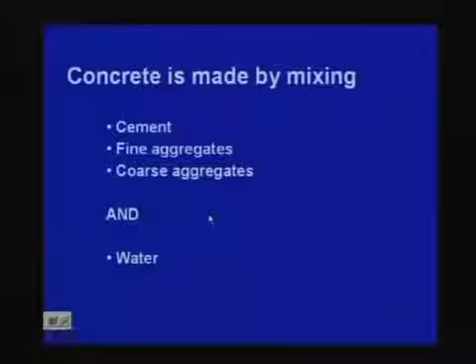As I have told in the last class, concrete is made by mixing cement, fine aggregates, coarse aggregates and water, and the proportion also I have shown as a schematic one - coarse aggregates, sand, cement and water. I have already told in the last class, just to repeat this one, one or two slides.

We shall come to workability. That means the fresh concrete, or green concrete, should be able to flow. You can mix it and put it in any way, you can put it and get any shape. So it should be workable. If you add less water, it will be almost dry, and then you cannot get the required shape, it may simply break. If you have more water, it can flow like fluid, and then also it is difficult to get the proper shape. So workability is very important so far as casting concrete is concerned.

So what we say is workability - a concrete which can be readily compacted is said to be workable. The amount of useful internal work necessary to produce full compaction - we mean the friction between aggregates whenever you are compacting that concrete. So between the aggregates there is some internal friction, as well as with the formwork where you are placing the concrete, for that also you need that internal friction that you have to work on. So how much internal work you have to do, and on the basis of that also we can say that workability.

Now, according to ASTM definition, this is a very standard code definition of workability - the property determining the effort required to manipulate a freshly mixed quantity of concrete with minimum loss of homogeneity. So whenever we are talking about this, for concrete - for coarse aggregates - you can make it so that it will be homogeneous. That means one portion of your concrete will not be just coarse aggregates, or another portion just sand. So it should be homogeneous, the whole concrete should be there, and that is according to ASTM definition.

We can go to another one, the American Concrete Institute, they are also having their own definition. So this ACI definition of workability: property of freshly mixed concrete or mortar which determines the ease and homogeneity with which it can be mixed, placed, consolidated and finished. So this is the definition of workability according to ACI.

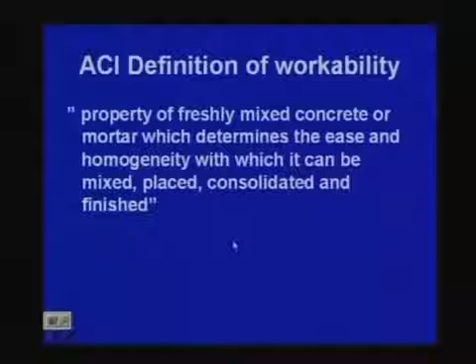So these are the two important bodies so far as materials are concerned, for any standard - ACI as well as the other one. So let me repeat once more so that it will help you to note down: property of freshly mixed concrete or mortar - it can be concrete as well as mortar. Concrete means you have cement, sand and coarse aggregates, and mortar means cement and sand, only fine aggregates. So these are the two things - mortar we use for placing bricks, and for plastering, there also we use mortar - which determines the ease and homogeneity with which it can be mixed, placed, consolidated and finished. So finally you will get the finished product. So that one we can consider as workability.

So it is very important so far as concrete is concerned, that workability is an important property. It is also required because, as I told you last class, there are so many steel bars, and you have to place your concrete so that the coarse aggregate will go in between those bars. Otherwise, if there is a void, then concrete will become weak and the whole structure will become weak. So that is why it is very important to consider, and by that you can assess workability.

Now, another part is called consistency. The ACI definition: consistency is the relative mobility or ability of freshly mixed concrete or...

Consistency is the relative mobility or ability of freshly mixed concrete or mortar to flow. This is measured by slump. So other way also we can consider that we can find out the consistency of concrete, and that how we can measure the consistency of concrete, that we can find out by slump. Now, what is slump? That we have to find out.

So, what is slump, that we have to find out. I repeat once more, the consistency is the relative mobility or ability of fresh mixed concrete or mortar to flow. So, just by getting the consistency, we can find out how we can make it workable. The other way, indirect way of measuring that workability, is by slump.

So, measurement of workability by slump test is used extensively in site work. We are talking in site, after all the concrete is cast in the site itself. So we have to find out the workability from the slump, and this slump test is used extensively in site work all over the world. So we use it extensively.

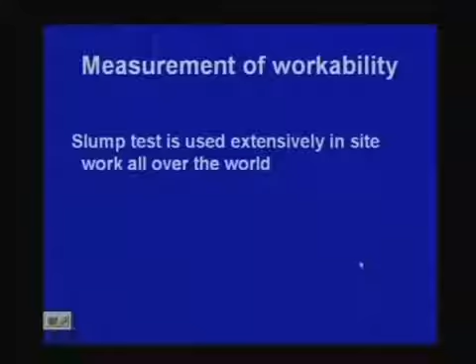So, what is the slump test? There is a mold for the slump test, which is a frustum of a cone, 300 millimeter high. It is placed on a smooth surface with the smaller opening at the top and filled with concrete in 3 layers.

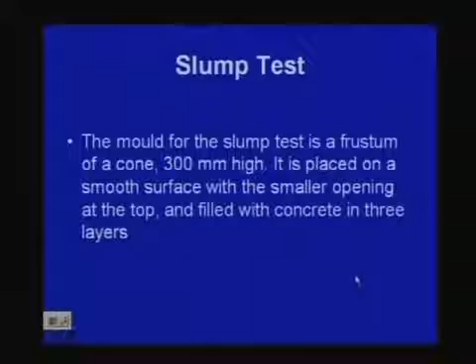What we actually do is pour concrete here in 3 layers. We pour concrete in 3 layers, then place it here, and then we simply lift it. We lift it, and concrete will come out, and from there we can find out. So let me tell you this way - this is your slump cone.

This is a smooth surface, a slump cone. You are pouring concrete through this. In 3 layers you have to pour, and we have to make 25 strokes. Each layer is tamped 25 times with a standard 16 millimeter diameter steel rod, because we have to do some kind of standardization.

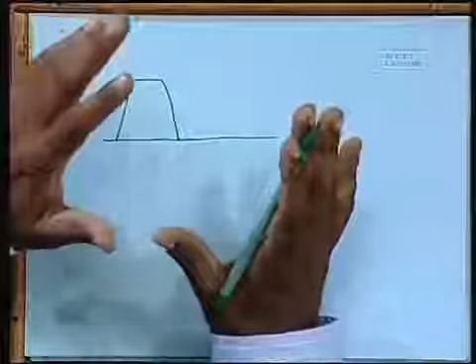Now, when it is done, you just take out the cone with those 2 handles. Then what will happen? You will find that if the concrete proportion is such that it is almost solid, you may get the same shape, the frustum of a cone. If the concrete is mixed properly with water, you can get the shape even after taking it out. So then we can say we are having 0 slump.

There is no slump, it is not coming down. We can say there is no slump, but it may happen like this also.

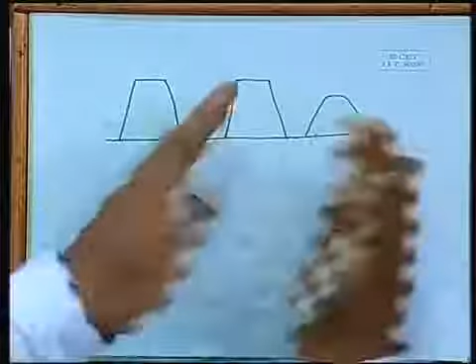It will go out, meaning it will try to flow. Then the remaining part is the slump. It may be 5, 10, or 20 millimeters - more slump means more workable. That means you can work with it easily, but you do not know whether you can achieve the strength or not - that is a different issue. We are talking about workability of concrete. If we get more slump, we can say we have more workability.

Whenever we are talking about this, for design mix, when you have to mix the design, you have to specify the slump also - how much slump you need. That is one important criteria. Because of that, we generally consider what is called nominal mix. I told you M15 - nowadays M15 is actually not allowed as per IS 456-2000. The minimum grade permitted is M20. M20 means...

1:1.5:3. Similarly, M25 means 1:1:2. Let me repeat. Initially M15 was there, so that is 1:2:4 - 1 cement, 2 sand or fine aggregates, 4 coarse aggregates. M20 is 1:1.5:3. M25 is 1:1:2. These are called the nominal mix.

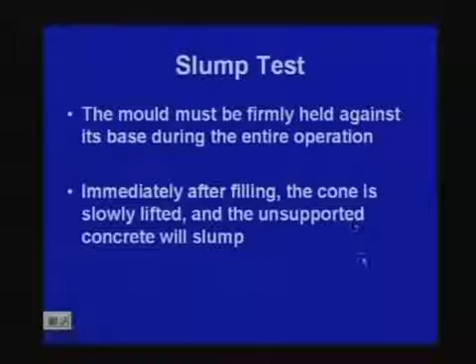That means it will almost flow, so very high workability makes it easier to work with. So that is when it can flow - very high workability. This is something we specify qualitatively, not exactly - it is not possible to get the exact value of workability, but we give a range. If we get within this range, we consider it one particular case. In other words, you can consider it as a little bit fuzzy gradation. The other aspect is durability, because workability is one aspect, the other aspect is durability.

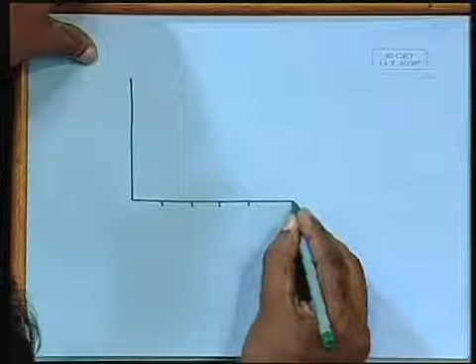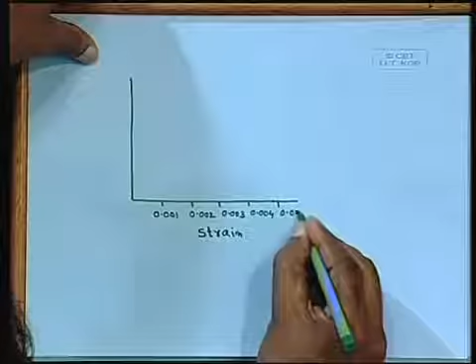Coming to this, I think I can show you one graph that is very important, because this is something we have to find out. So we have strain, and we have stress.

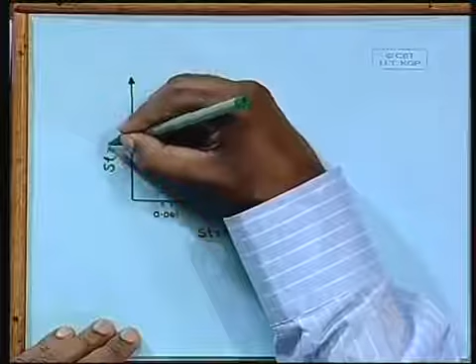Now we have different types of concrete. If we test concrete cubes, we can measure the stress and strain. In other words, you can find the deflection and the applied load, say for a 150 millimeter cube, we find out how much it is compressed. From there we can find the corresponding strain, and the applied load, and since we know the contact area, approximately 150 by 150, though after casting it may be 151 by 152, we measure it exactly for a particular cube. So generally it is 150 by 150 by 150, but the top and bottom surfaces may be 151 by 151 or 151 by 152. On the basis of that we find the corresponding stress, applied load divided by the area, and we can find out the stress-strain curve. This is the important part for any material, to find the stress strain curve.

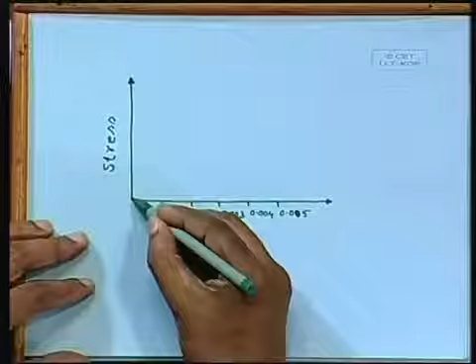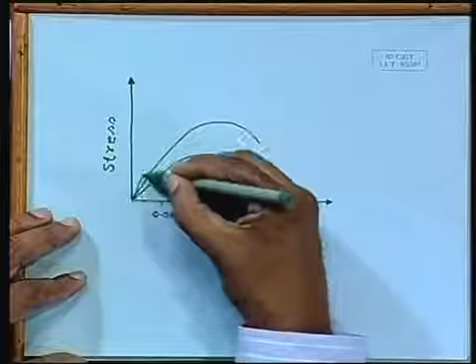So we can find out a curve like this. Something can go like this, the other one can go... if the concrete has higher strength, then it can go a little more, like this. Let us say this one is low strength, this one is medium strength, and this one is high strength concrete.

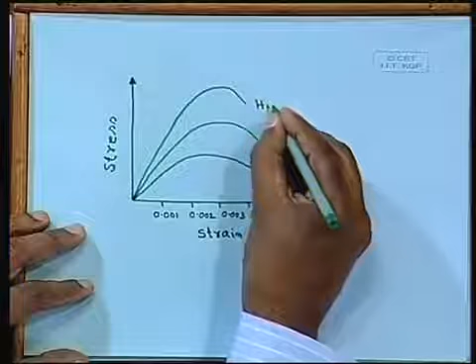It is worth mentioning, generally M20 up to M25 we use for reinforced concrete. For pre-stressed concrete we take M35, M30. For concrete pavements, we use M40 grade. So for different applications we use different strengths.

Now this is the stress strain curve, which we shall use when we go for actual design. In actual practice, if you test it, you get this type of stress strain curve, and you can only get it from experiment, because there is no other way to find it out theoretically. For steel also you have to find out the stress strain curve in a similar way.

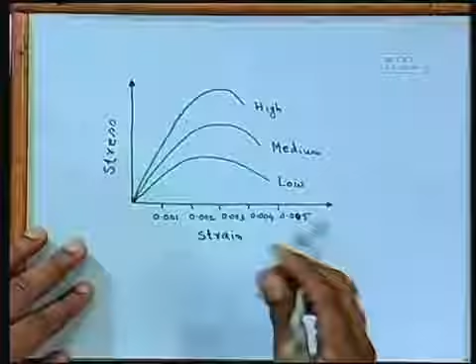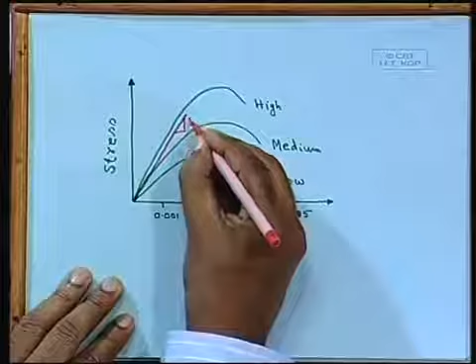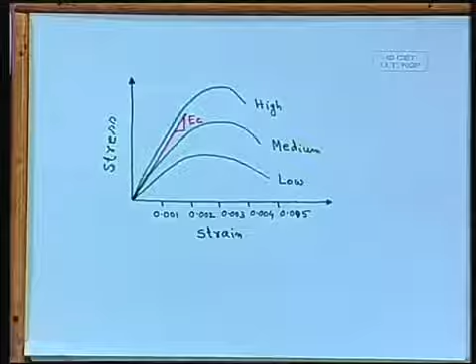You can also find out another thing, let us say EC, the modulus of elasticity of concrete. That is also another part we have to find out. From the stress strain curve we can find out the modulus of elasticity and the behavior of the curve, because at a particular strain we are interested to find the corresponding stress. That is very important when we do our design calculation, and that is why this stress strain curve is so important.

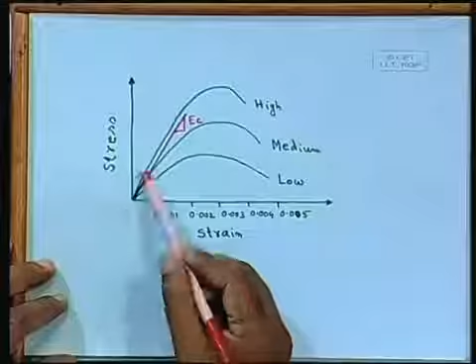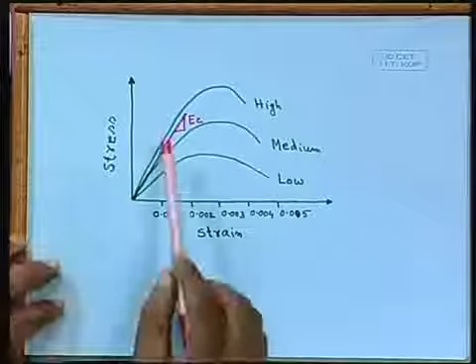The modulus of elasticity will vary according to the stress strain curve, since it is not constant. We are taking the initial one. If you consider a secant modulus, you get a different value - at different points you can find different modulus of elasticity. But here we take the initial one and use that. We shall find out what the corresponding modulus of elasticity should be for concrete from IS 456.

Regarding concrete, the tensile strength is generally 8 to 10% of the compressive strength. For our case, for concrete, we shall simply ignore the tensile strength. We shall assume that concrete will not take any tension for our design, and that it will be taken care of by steel only.

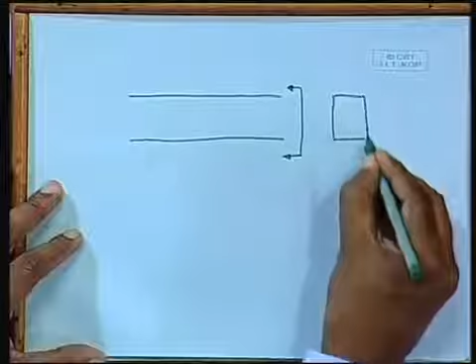In other words, one interesting thing - when we talk about this assumption, let us say this is the section we are discussing. If we look from this side, we may get a member like this. Let us say there is a bar here. Let us put a proper boundary - though the detailing is not like that, but let us consider it for now since we haven't gone to that level. Let us consider this is the longitudinal section, and we are having this bar.

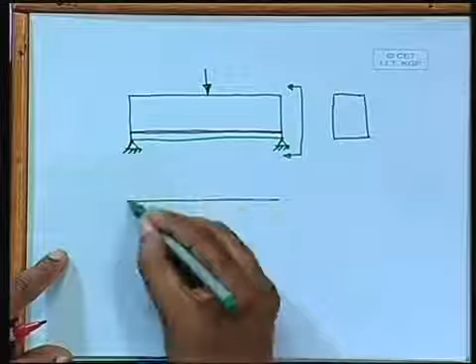I could put it in some other color. Actually, let us say this is the steel bar, and though the support is not like this, let us provide the support with which we are familiar, and let us apply a load. Then what will happen here? We have to find out the bending moment. If this is P, then this one is PL by 4.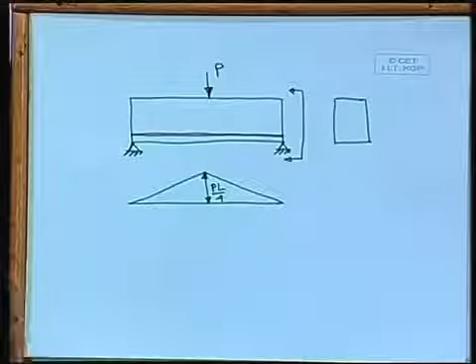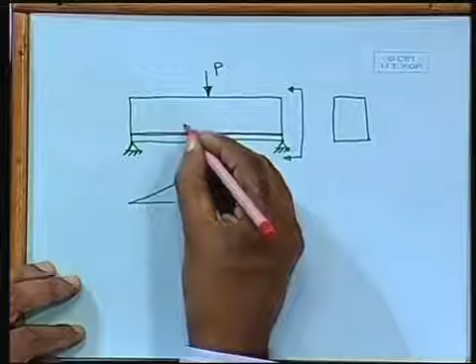So what happens here - if we apply this load, the top will be compressive and the bottom will be tensile. So we are assuming that concrete will not take any tension, and only the steel will share that part. It means there are cracks here, so many cracks here.

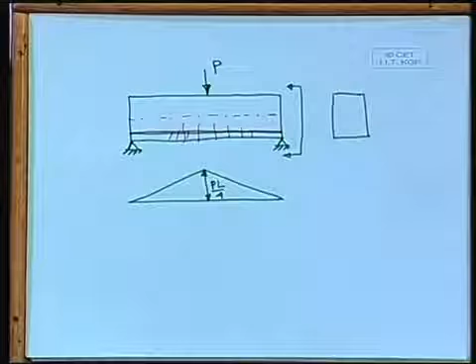That means there is no connection in that concrete. So then only I can say that steel is only taking the load, because if there is no crack, if that is continuous, that means concrete also is taking the load. But since I have already assumed that only steel will take, that means we are considering a cracked section, and the section has a neutral axis somewhere, not the center line, the neutral axis. Above the neutral axis it will take the compression, and whatever concrete is at the bottom, it will not take any tension, the steel will only take that. That is the assumption we are doing for that particular case.

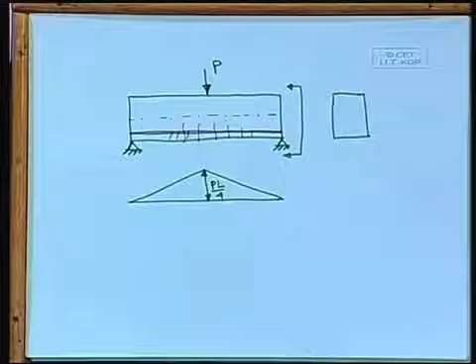But anyway, coming to this one, just for your reference, we consider here that we can get it from experimental observation, that 8 to 10% of the compressive strength is what we can achieve, as far as tensile strength is concerned.

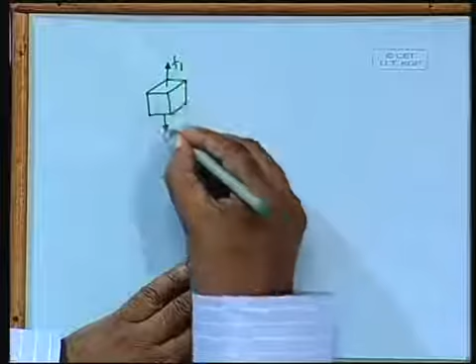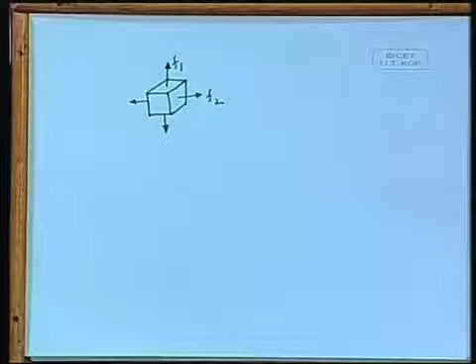Another part is called biaxial strength. What is that? If we take one element, and this is the corresponding stress, so we are taking a particular point in the whole body, and there we are finding what is the corresponding stress in two directions. So F1 and F2, these are the two stresses, and how they interact. That one also we can find out, and that is called the biaxial strength. To get it, generally we get it like this.

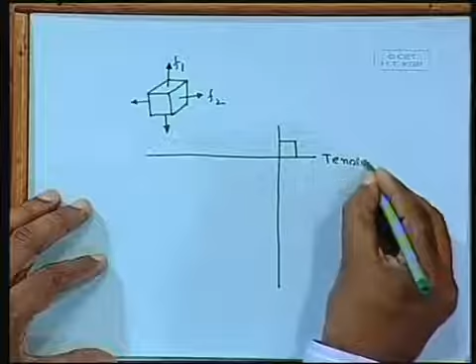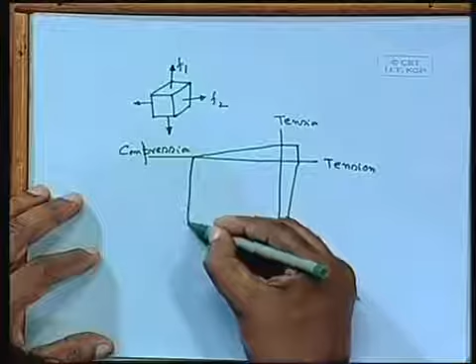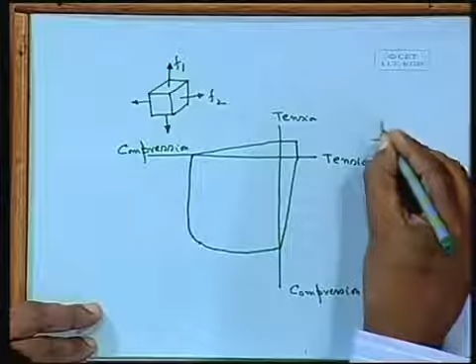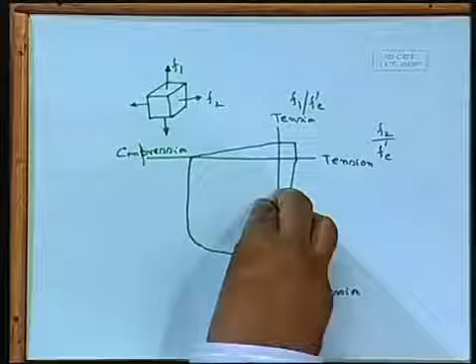We shall come again in detail at a later stage. Just to give you one schematic description, this one is tension, and this one also tension, we are plotting tension here and compression there. What we shall get here, since concrete is very weak in tension, we shall get a very small component here. On the other side it will be more, because the compression side will be more. This is the limiting zone we are talking about, whenever we have one element. If you remember your solid mechanics, the failure theories, there you will find principal stresses sigma 1 and sigma 2, let us say here F1 and F2. This is F1, and F dash C is the failure load, the maximum compressive strength it can take, which we get from the cube strength. So that is F dash C, and this is F2 in one direction, and on this side we get F1 by F dash C. From this we can find out the zone, how far it will go in tension and in compression. Whenever we talk biaxial, both axes could be tensile, both could be compressive, one axis tensile and the other compressive, and vice versa.

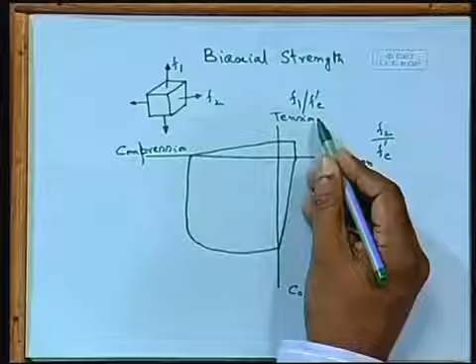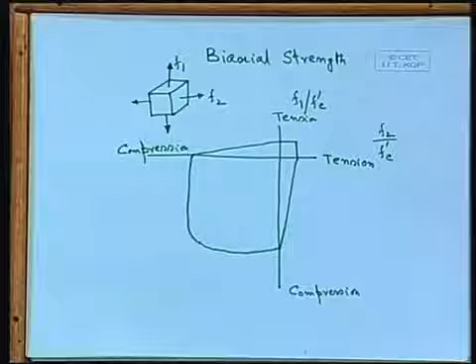Let me write down biaxial strength. So far I have told you about the cube, that is uniaxial strength, because we are simply applying load and finding the maximum failure load it can take. Now if it is biaxial, it can have compression-compression, tension-compression, compression-tension, tension-tension, all 4 possible cases. Since concrete is very weak, we get a smaller safe zone. If it goes beyond this, it will fail. So this is the zone within which concrete is safe. In this zone we have tension-compression, and similarly here also considering symmetry, tension-compression, and on this side we have the maximum, because concrete is very strong in compression, that is why we get more in this direction. So this is useful to find out where we have biaxial stresses, loading applied in two directions, then it is very useful. From there we can find out the failure load.

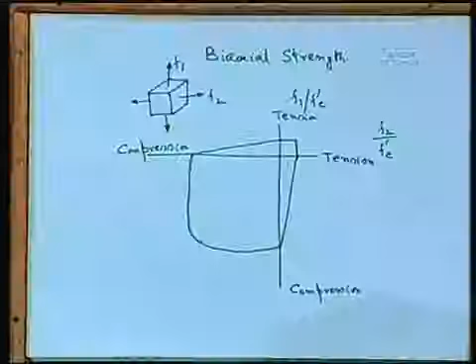The other important part is called creep, because I started telling you about compressive strength, tensile strength, then biaxial. Now we are talking about creep, because this is important since it is time dependent. Creep is time dependent. Both axial and bending deformations of reinforced concrete members increase with time. So deformation will increase with time, so it may happen.

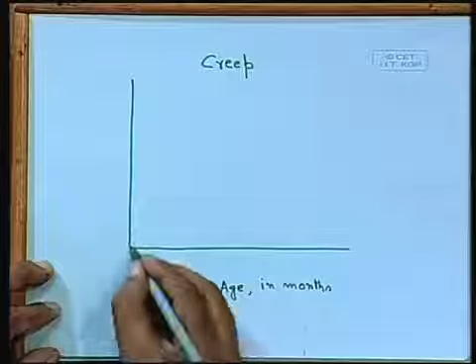What we can do, I can show this with another curve. We can consider the age, that is in months. Let us give the heading creep. So what happens here, we have cast it, and this one is deformation.

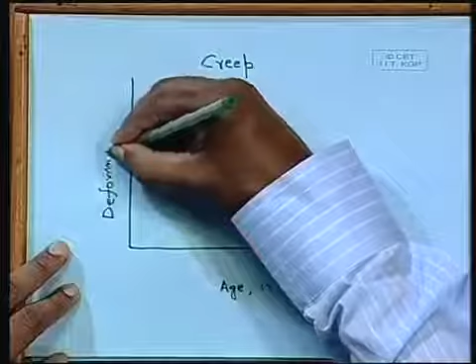So if we start with, let's say this is 2 months, 4 months, 6, 8, 10, 12 months, like that we are going. Now what happens here is that if we cast it today, we can apply load after 28 days, that means almost after 1 month.

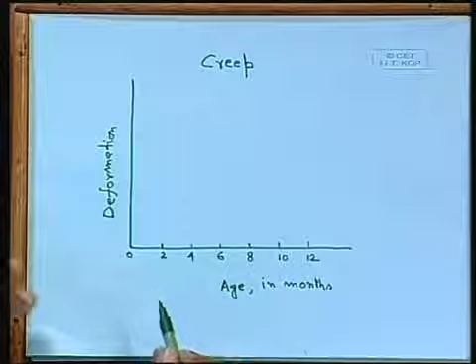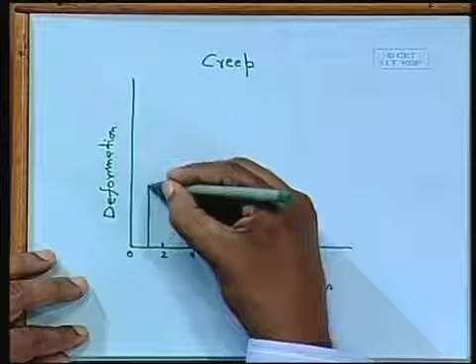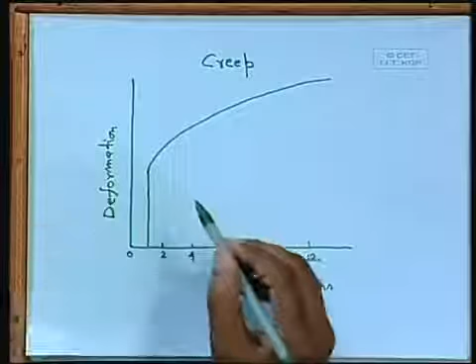So we have applied the load. Immediately there will be elastic deformation. We have applied load, so immediately we shall get that elastic deformation, and then it will start, and over the months we may find the curve something like this. We are having a constant load and the curve may go in that particular fashion, where it will keep on deforming and go like that. This is under constant load.

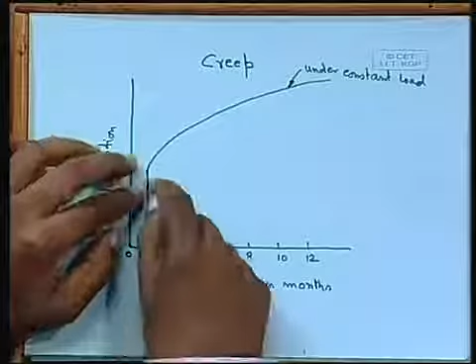So it may happen that we are considering one reinforced concrete beam, say 3 or 5 meters, and at the middle we have applied a certain load, say 5 ton. Immediately we shall get certain deformation, deflection. We can measure the central deflection, and we are getting this much. When we get this particular deflection, if we keep that load applied, even then it will start deforming, and that is due to creep, but the load applied is the same, constant load, say 5 ton for example.

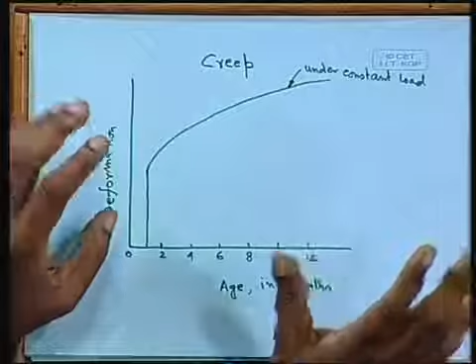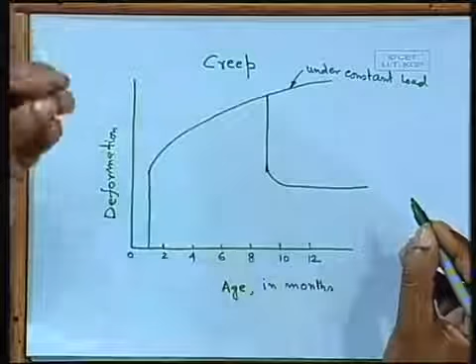Now after few months, if we take out that load of 5 ton, then what will happen? We shall get the elastic recovery, but it will not come down to zero, even if we take it out after a few months. It will not come down to zero, because if you take it out immediately then it will come back, but we are taking it out after a few months.

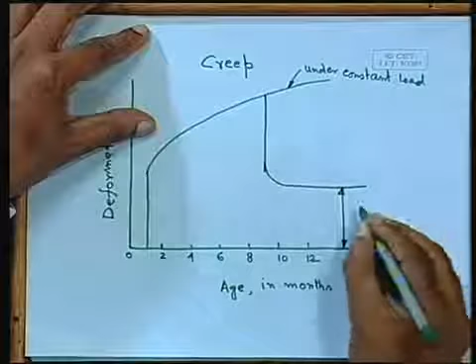So this is your non-recoverable deformation, and that we are getting due to creep. That is a time dependent phenomena that we are getting, that is due to creep.

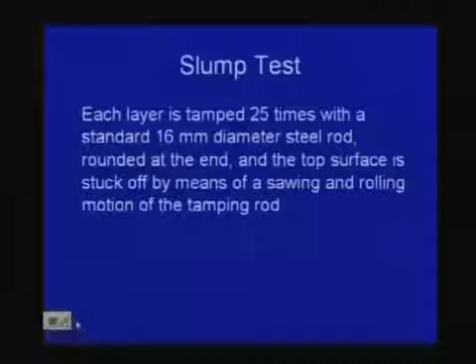So the total deformation is divided into two parts: an initial instantaneous deformation that occurs with the application of load, and a time dependent deformation termed creep that continues at a decreasing rate for a period of years. So that means we have to consider at least 1 year for that particular one.

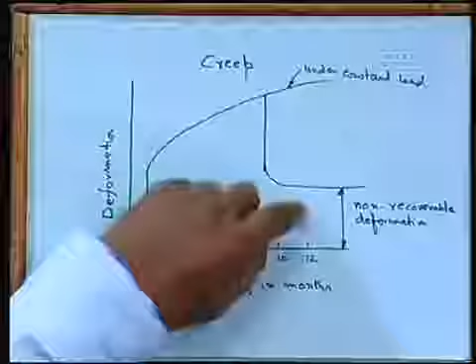At least I should start here in this particular case, say at 12 months, I should make it. Here I should make that particular curve, at least at 12 months, so that we can show that. Please note that particular curve which I told earlier should be made at the 12 months. Okay, so this is the one that we are considering as creep.

The other one, apart from creep, is called shrinkage. This is another aspect: as the moisture evaporates, the concrete volume shrinks. The shortening per unit length associated with the reduction in volume due to moisture loss is termed the shrinkage strain, or simply shrinkage. I repeat, as the moisture evaporates, the concrete volume shrinks. The shortening per unit length associated with the reduction in volume due to moisture loss is termed the shrinkage strain, or simply shrinkage.

So creep, and the other one we consider shrinkage. These are the two things that you have to consider in our calculation.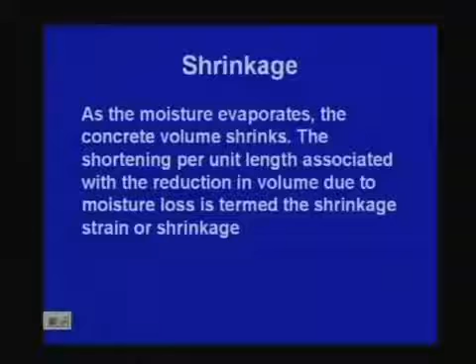So I shall continue. Okay.

Okay, now we have almost finished the materials part, because now we know, and also for steel we shall consider what our IS code says. So now we are coming to the point where we know the limitations by which we have to work. Concrete is not so simple, it is really sometimes a nuisance also.

But even then, almost 90% of the work we do is with concrete only. And concrete has another aspect, another important part, that is maintenance. So workmanship of concrete, if it is done properly, you can see that the work is done well.

For example, if we consider our institute's main building, you will not find any crack there. That means the workmanship was really good. Whereas sometimes in new buildings anywhere you may find cracks. That means there is some difference in the workmanship. If it is done properly, it will really withstand the load and be there forever, for the expected life for which it is designed.

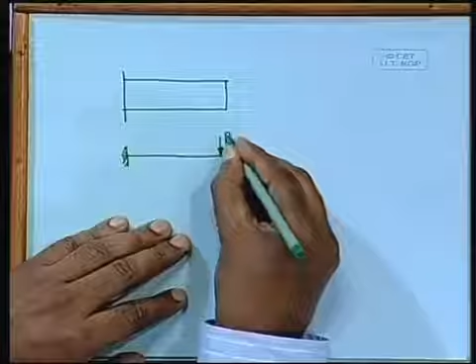We shall look at a cantilever beam. If we consider a cantilever beam - in another way you are familiar, just simply like this - this is your cantilever. So far you have done this type of problem, and we can apply the load, say certain load P, and let us say...

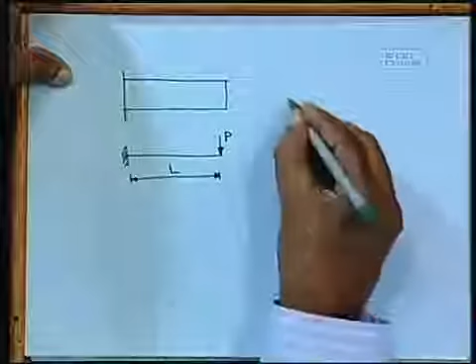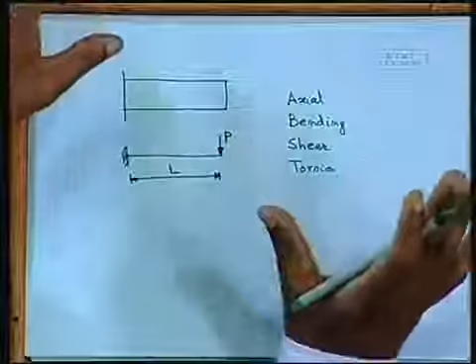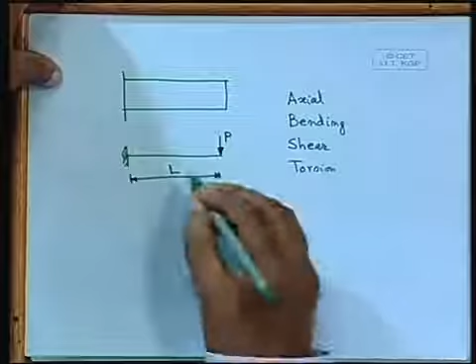When we are talking about this particular problem, first we have to provide a suitable section. Whenever we talk about a beam, if we find there is say an axial load - not talking about beam now - it can have axial load, bending, shear, and torsion. Different elements, the way they are oriented or configured, will not necessarily take all these loads. For example, for this particular beam, the governing, dominating ones are bending and shear.

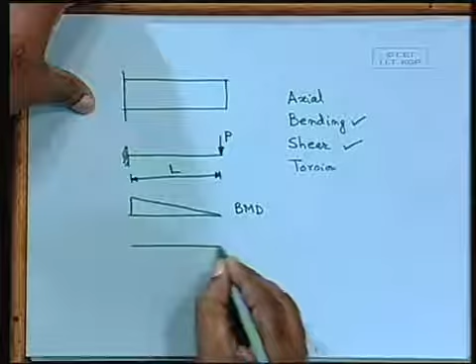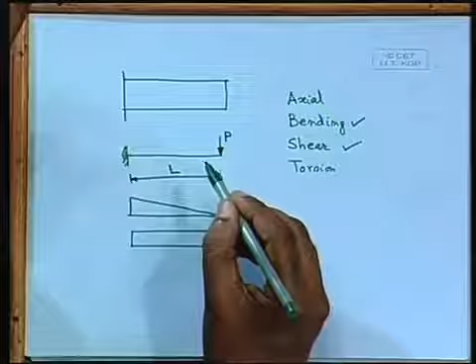So you can find out the bending moment diagram, and you can find out the shear force diagram. So what we shall do, to take care of the bending, we have to provide a suitable section and provide the longitudinal reinforcement.

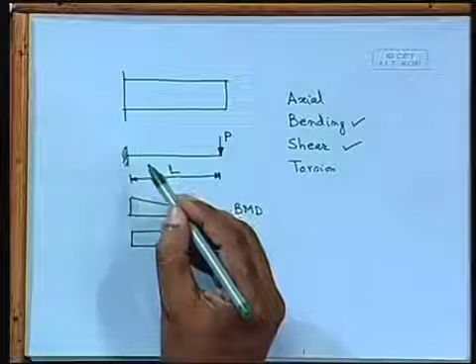In this particular case, the top will be in tension, that means you have to provide reinforcement at the top. Now by mistake, if somebody provides the reinforcement at the bottom only - the top reinforcement which is supposed to be given, but instead given at the bottom - that means if you take out the formwork, the shuttering, the cantilever beam will simply collapse, and it happens also. That particular thing happens also.

So this is called the detailing of reinforcement. Even if you calculate correctly, still due to just the detailing at the construction site, it can mislead to a disastrous end. So that is why in reinforced concrete, detailing is also important.

So we shall move to the different methods and start the design of beams, beginning with flexure, that means bending. We consider bending separately, shear separately, torsion - all of them we consider design separately. So for bending, we shall start with bending. Next class we shall start with bending and the different methods. Okay.